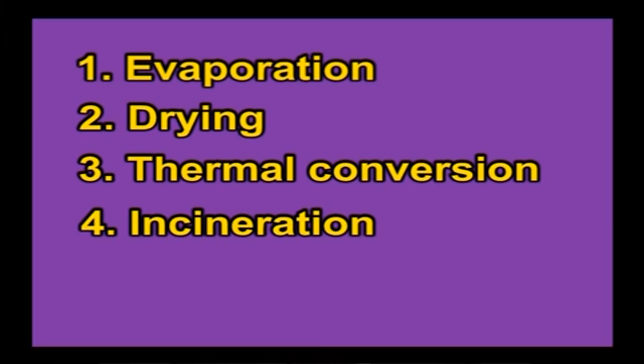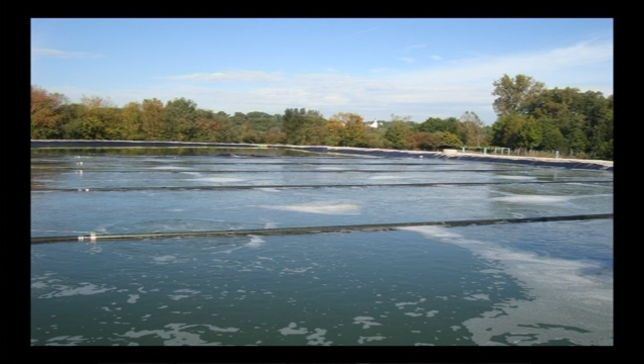Let us understand both the topics in this session under the following headings: evaporation, drying, thermal conversion, incineration, cleaning out flue gas, and solidifying outputs. The first topic, evaporation. Evaporation is a method used to concentrate non-steam volatile wastewater components. The evaporation plant contains a vapor condenser by which vapor and steam volatile compounds are separated from the concentrate.

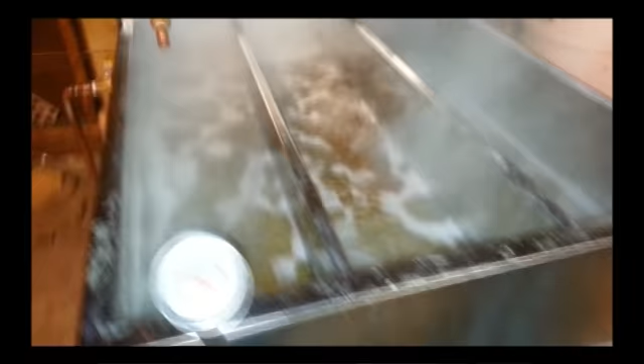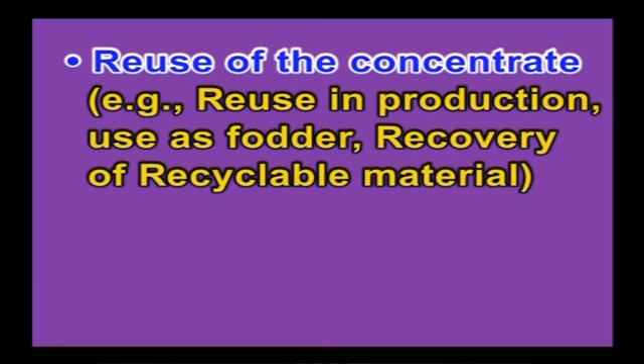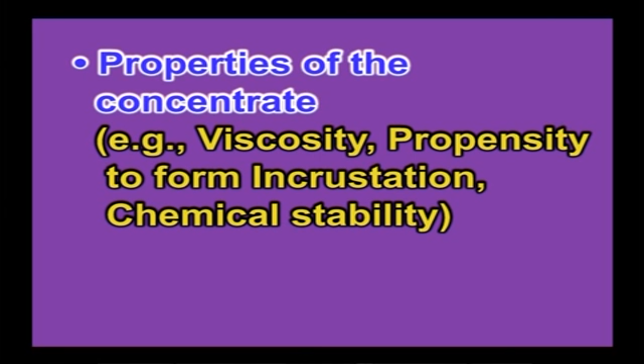While the concentrate is then recycled into the evaporator, the exhaust steam can be used for indirect heating of other evaporator stages. The degree of concentration of the wastewater components depends on different factors. For example, reuse of the concentrate, such as reuse in production, use as fodder, recovery of recyclable material; type of disposal of the concentrate, such as incineration or landfill; properties of the concentrate, such as viscosity, propensity to form incrustation, chemical stability.

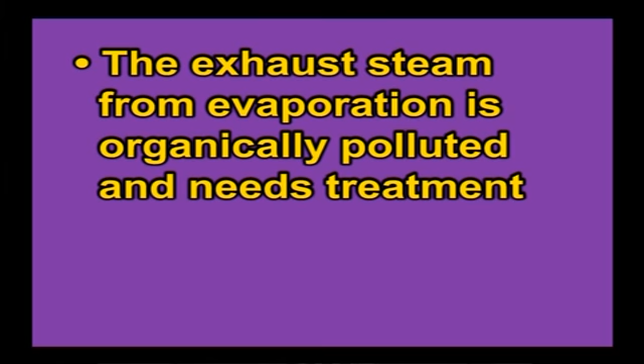Advantages of this method include: the residue can be reused as fodder and fertilizer, only a small area is needed, exhaust steam can be reused as energy, and it is considered state of the art in the food industry. Disadvantages of this method are: the exhaust steam from evaporation is organically polluted and needs treatment, and rather high operation and maintenance costs.

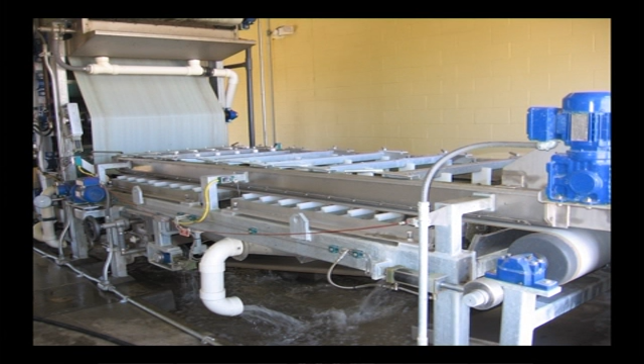Drying. Drying of a food material occurs when water vapor is removed from its surface into the surrounding space, resulting in a relatively dried form of the material. Drying differs from the dewatering process. In dewatering, liquid water is drained or squeezed out of the material, but during drying, the heat can be supplied in different ways: convection, radiation, conduction, microwave, radio frequency, or even joule heating.

The principle of drying, no matter what drying mechanisms are involved, can be generally expressed by the following surface vapor flux equation: N''v = hm (ρv,s − ρv,∞), where N''v is the vapor flux measured in kg per square meter per second, hm is the mass transfer coefficient measured in meters per second, ρv,s is the interfacial vapor concentration at the moist material surface, and ρv,∞ is the vapor concentration in the surrounding space that vapor travels into, measured in kg per cubic meter.

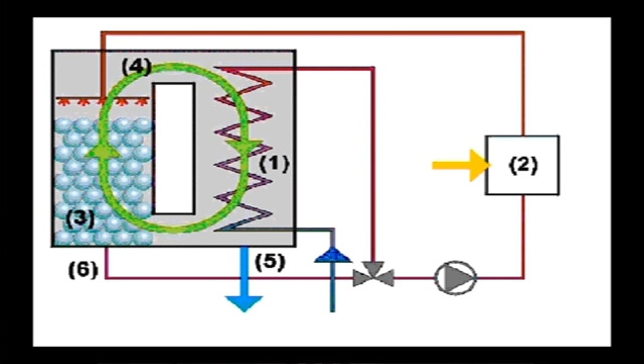hm is determined by the flow field around the material being dried, in meters per second, which may be viewed as a velocity of mass movement. When this vapor concentration difference is positive, vapor leaves the material and thus drying occurs. The reverse is the wetting humidification process. The drying process as a whole has to involve the generation of vapor, transforming from the liquid phase in the moist material to the gaseous phase on and within the moist material being dried, and the transport of the water phases towards the outside of the material.

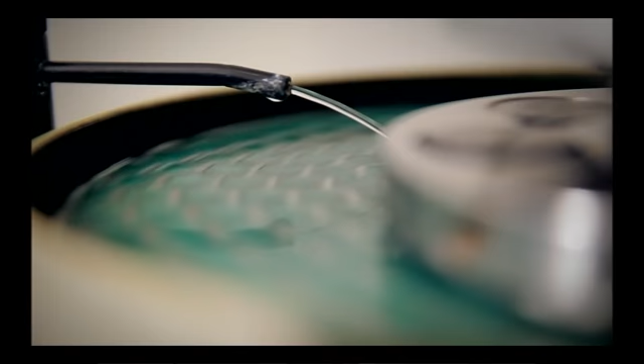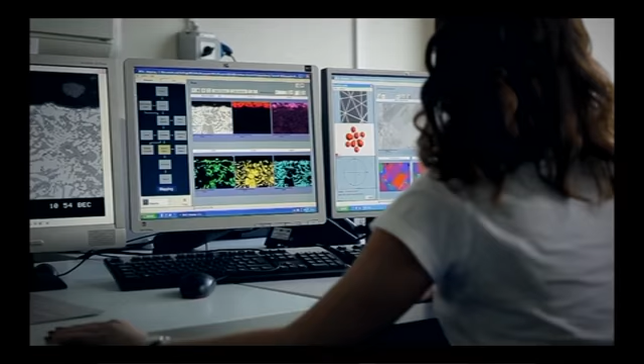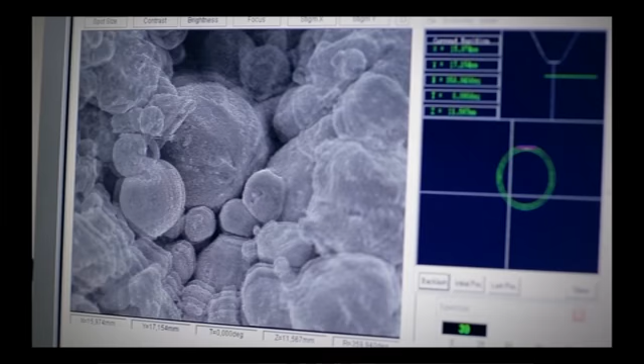Some debates are around how liquid water may move within the material structure. The microstructure of food materials is particularly relevant to drying, as both liquid water and water vapor move within the structure. The microstructure, as far as the transport of heat and chemical species is concerned, is mainly made up of compounds such as protein, fat, carbohydrate, minerals and air. Porosity and tortuosity are usual characteristics. The material's composition and its affinity to water play a key role in water holding capacity and local evaporation rates.

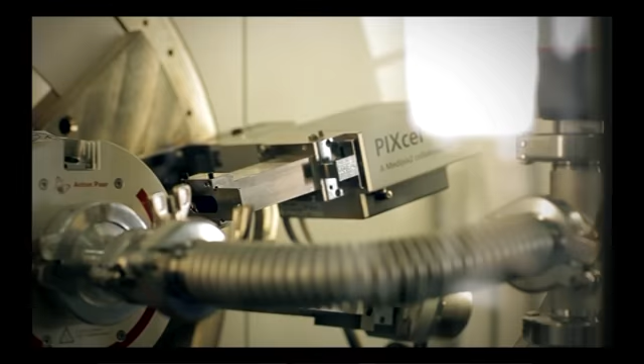Drying also creates a new microstructure as it progresses, and the spatial distribution of the microstructure characteristics, density included, is important in texture perception of the product and affects how it may be used as an ingredient for mixing into other foods. For instance, the reconstitution properties of food powders created by spray drying. For instance, microencapsulation is employed to protect active and beneficial ingredients such as probiotic bacteria during drying.

Drying is also preferably done at the lowest temperature possible for the same purpose of achieving higher retention of bioactivity. Bacterial cells or microorganisms are vulnerable in the drying process, especially when a high temperature environment is encountered. Drying may be viewed as a thermal processing stage. On the other hand, as mentioned above, preservation of the activities of good beneficial bacteria such as probiotic bacteria becomes important when the drying process can be detrimental.

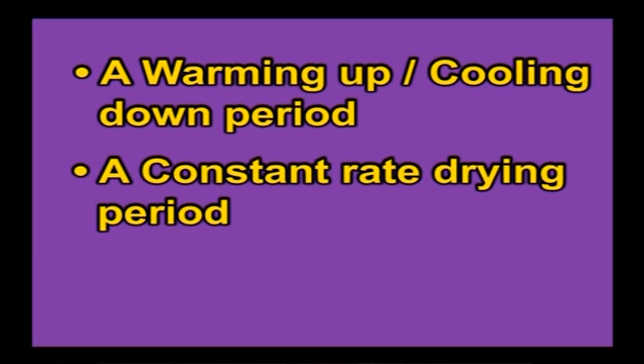There has been much research effort spent on understanding the fundamentals of drying and more complicated mathematical models published in the literature, but a concise introduction of drying still centers on the notion of three drying stages: a warming up or cooling down period, a constant rate drying period, and a falling rate drying period.

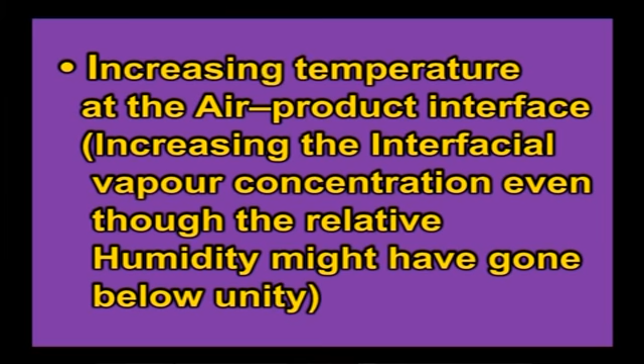The maintenance of the constant drying rate period may be due to two reasons. One is the increasing temperature at the air-product interface, that is, increasing the interfacial vapor concentration even though the relative humidity might have gone below unity. The other is due to the material's surface nature, where relative humidity can be kept constant for quite a long time.

There have been a large number of studies published in the past 2 decades on the drying of food and biological materials. In particular, the Page model appears to be the one that is the most successful in describing the weight loss versus time data obtained in a constant environment for drying.

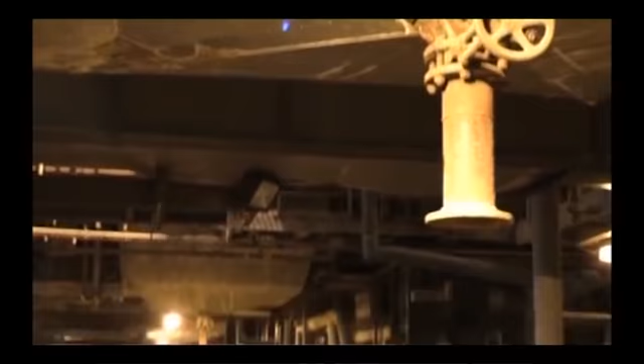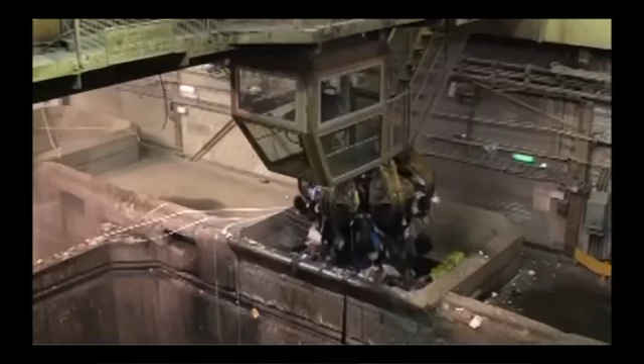Let us understand what is thermal conversion. The thermal conversion of solid waste includes transformation of wastes into gaseous, liquid and solid conversion products. The process also generates energy due to burning of waste materials. Thermal processing also results in waste volume reduction. Combustion or incineration, pyrolysis and gasification are the techniques employed for thermal conversion.

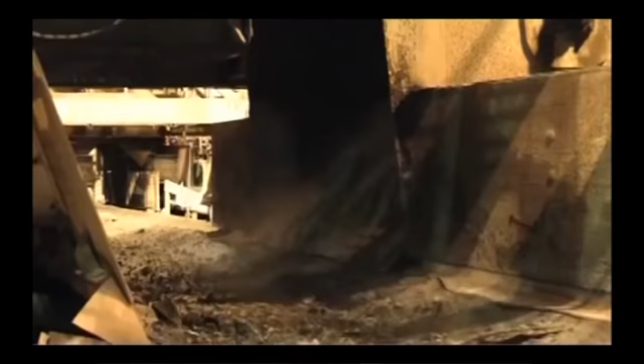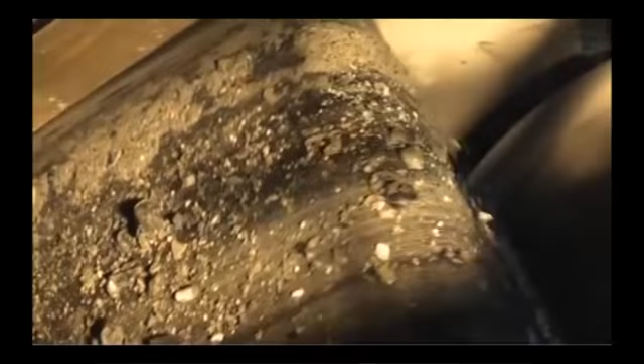A waste treatment technology which includes the combustion of waste for recovering energy is called incineration. Incineration coupled with high temperature waste treatments are recognized as thermal treatments. During the process of incineration, the waste material that is treated is converted into gases, particles and heat. These products are later used for generation of electricity. The flue gases are first treated for eradication of pollutants before going into the atmosphere.

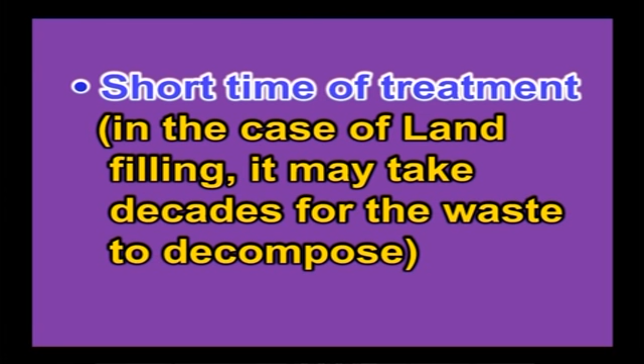Thermal treatment. In spite of the wide range of approaches to waste treatment in the food sector, in some cases thermal treatment is the most effective or the only one applicable. Compared to other disposal methods, it has a number of advantages such as short time of treatment. In case of landfilling, it may take decades for the waste to decompose.

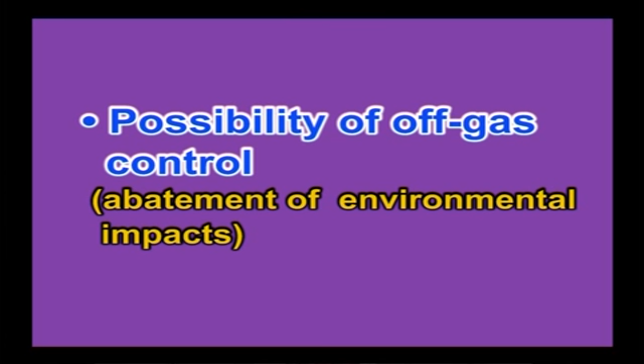Another one is the possibility of treating hazardous waste, as for example in the case of animal carcasses contaminated by dangerous contagious microorganisms, possibility of off-gas control, abatement of environmental impacts, and possibility of utilizing heat released by the oxidation process, that is waste to energy. The thermal treatment may be used for a wide spectrum of waste from solid to gaseous.

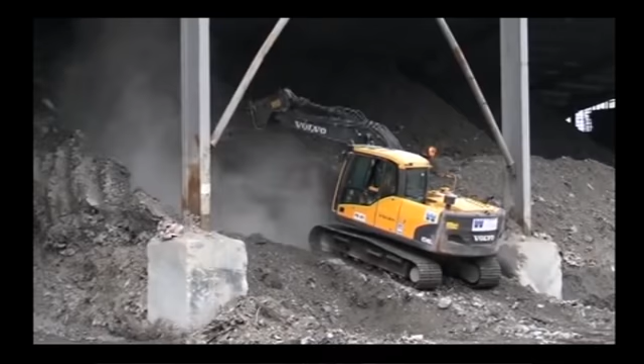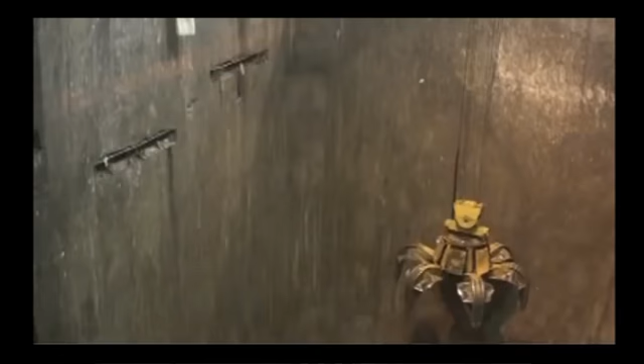The choice of suitable thermal treatment technology is then based on the type of treated waste and its characteristic properties. Examples described below include completely different technologies applicable to different types of waste. Incineration of solid residues with relatively low water content and free of hazardous properties may be performed in units very similar to biomass boilers. A typical example is provided by peach and olive pits. Due to the character of this waste, it is not necessary to equip the units with complicated flue gas cleaning systems.

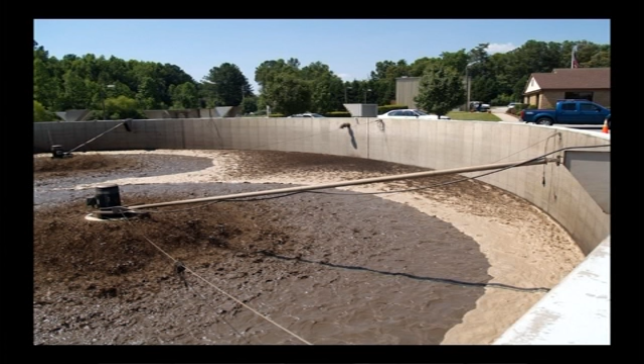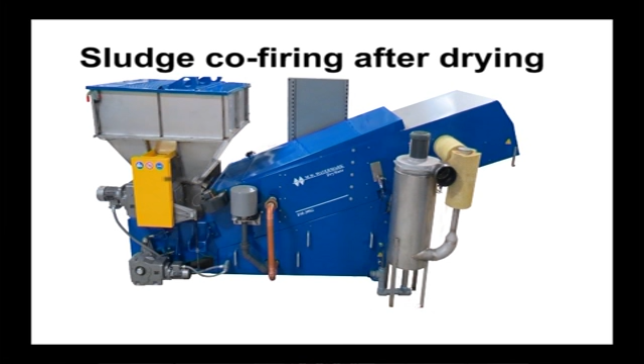Another example of solid waste is sludge, namely wastewater treatment plant sludge. In contrast to the latter example, high water content may be expected, thus requiring a completely different approach and technologies. One possibility is sludge co-firing after drying. One suitable process is cement and burned lime production, where an alternate fuel can be fed using a special feeder directly into the rotary kiln. In some cases, however, it is necessary to apply special sludge incineration technology.

This is very often based on a multiple hearth combustion chamber. For hazardous waste like some types of meat and bone meal, thermal treatment is the only alternative. In such cases, systems based on a rotary kiln and secondary combustion chamber are preferred.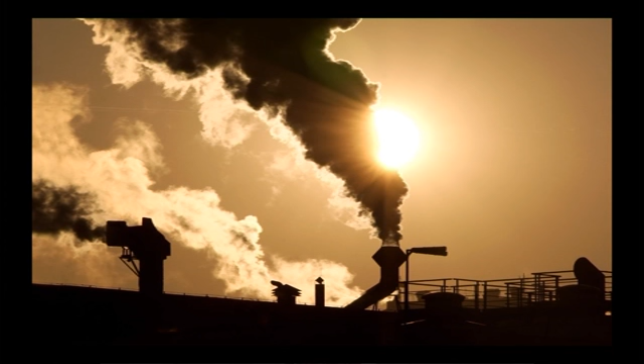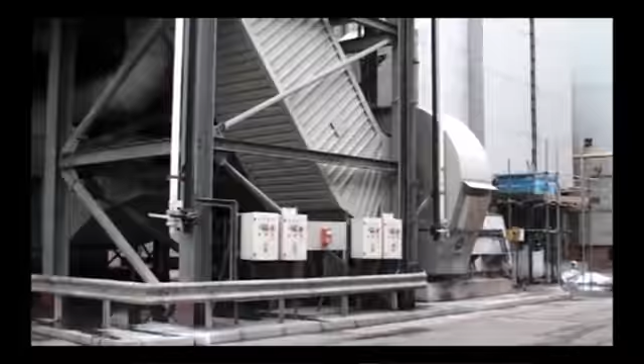Let us understand incineration. Incineration as a disposal method involves burning the trash. Sometimes this is simply referred to as thermal treatment, as a general category of high temperature treatment of trash material. This method can be used to transform waste into heat, gas, steam and ash.

One of the advantages of incineration is that with this method, refuse volume can be reduced by half or more, and it requires little usage of land. An incineration facility can be built in a small area to process huge amounts of waste. It definitely saves a lot of space compared with using a landfill only. This method is popular in countries like Japan, where space is a limitation.

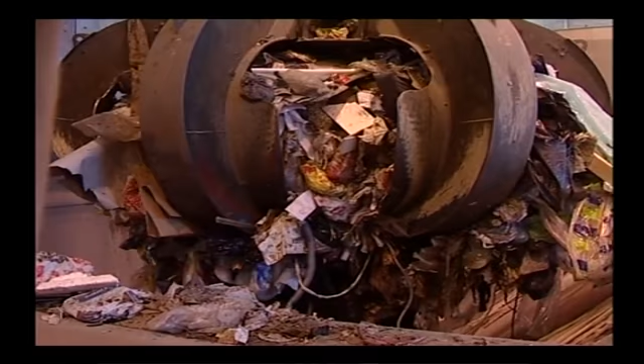Incineration of waste materials converts the waste into ash, flue gas and heat. The ash is mostly formed by the inorganic constituents of the waste and may take the form of solid lumps or particulates carried by the flue gas. Some incinerators generate energy from the burning of waste.

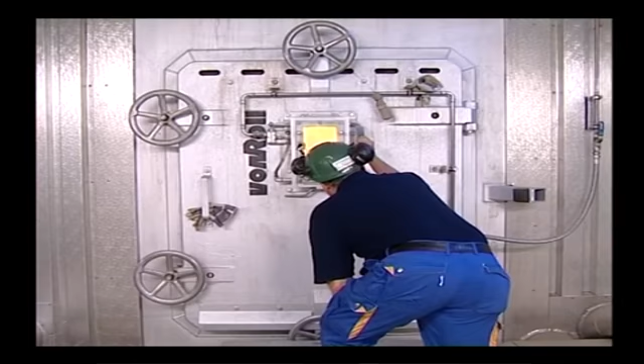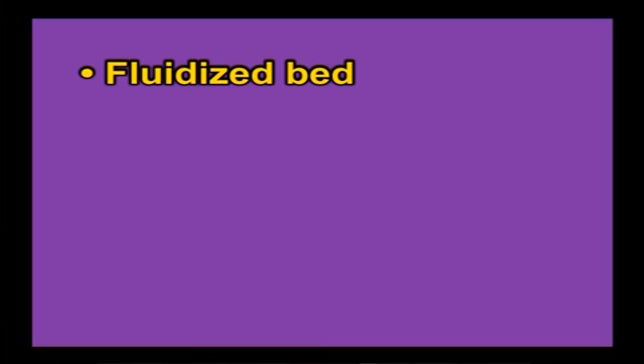These plants are called waste to energy plants. Incinerators reduce the volume of waste by about 90% and weight by 75%. There are 8 types of incinerators: fixed hearth incinerators, rotary kiln, plasma arc, liquid injection, fluidized bed, multiple hearth, catalytic combustor and static hearth incinerators. In 1885, the US Army created the first garbage incinerator in the New York harbor.

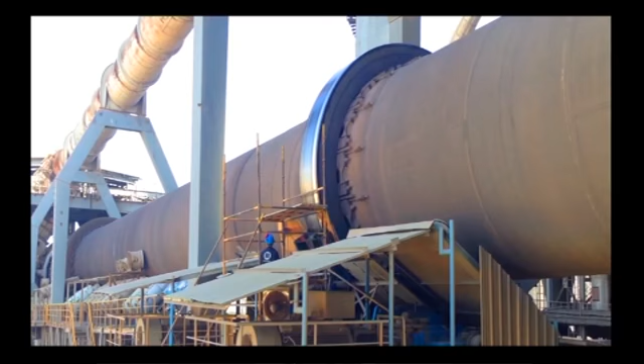Let us understand these types of incinerators. Let us understand the first one, rotary kiln. The rotary kiln hearth system has been used for several hundred years in the pyroprocessing industry. The rotary kiln concept accomplishes two objectives simultaneously: moving solids into and out of a high temperature combustion zone and mixing and stoking the solids during combustion.

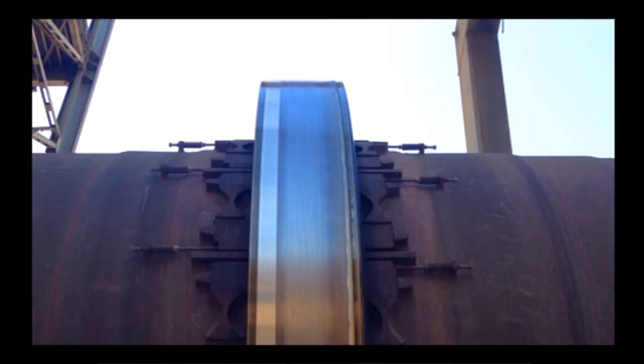In its classical embodiment, a kiln is comprised of a steel cylindrical shell lined with abrasion resistant refractory to prevent overheating of the metal. A kiln is generally inclined slightly toward the discharge end, and the movement of the solids being processed is controlled by the speed of the rotation.

In some instances, special provisions have been made for air cooling or water cooling the kiln shell, thus eliminating the use of refractory. For example, a steel kiln cooled with external water sprays known as the Lantz converter was developed for pyrolysis application in the mid 1960s. In the later 1970s, a new kiln technology emerged involving a water cooled kiln cylinder fabricated of steel boiler tubes welded together and manifolded for the introduction of feed water and withdrawal of steam.

The other one is the plasma gasification. Plasma gasification is another form of waste management. Plasma is primarily an electrically charged or a highly ionized gas. Lightning is one type of plasma which produces temperatures that exceed 12,600 degrees Fahrenheit. With this method of waste disposal, a vessel uses characteristic plasma torches operating at plus 10,000 degrees Fahrenheit, creating a gasification zone till 3,000 degrees Fahrenheit for the conversion of solid or liquid wastes into a syngas.

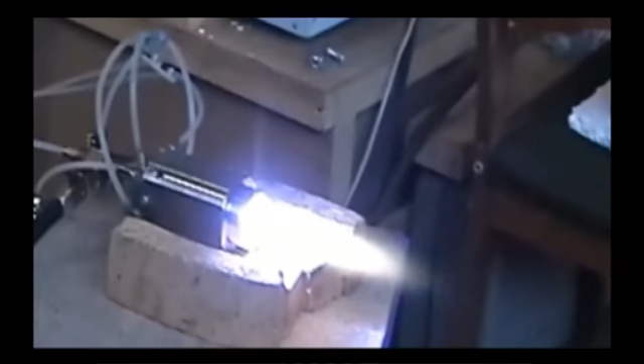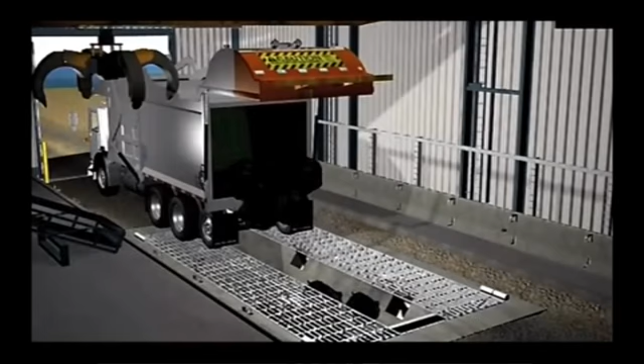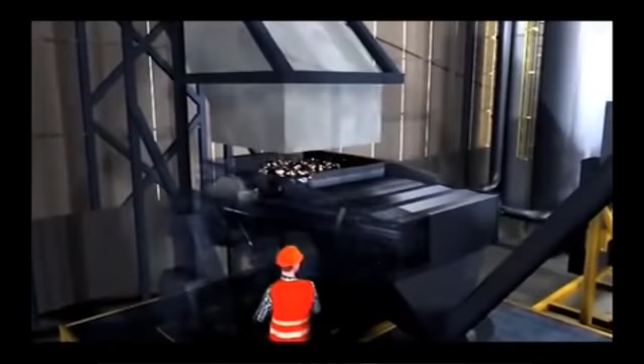During the treatment of solid waste by plasma gasification, the waste molecular bonds are broken down as a result of the intense heat in the vessels and the elemental components. Thanks to this process, destruction of waste and dangerous materials is found. This form of waste disposal provides renewable energy and an assortment of other fantastic benefits.

Plasma arc incinerators ionize inert gases via an electric arc between two electrodes. This plasma creates an extraordinary amount of heat ranging from 3000 to 7000 degrees Celsius. The extreme heat can easily break down organic compounds into their basic atoms, which later recombine to form gases such as carbon dioxide. Inorganic material is left as a stable, leach resistant slag. Concerns surrounding plasma arc incineration include ensuring that gas emissions are minimal and clean before being released to the atmosphere.

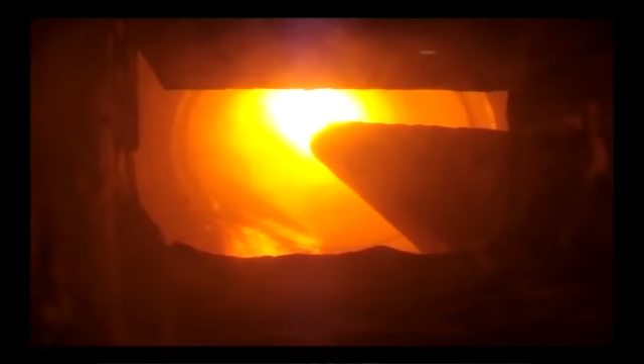Another type is the fluid bed systems. Fluid bed incineration systems, bubbling fluid bed applications in burning biological wastewater sludge and circulating fluid bed applications in burning hazardous wastes, are widely employed. These two waste management areas were the dominant applications of fluid bed technology in the United States at the beginning of the 1990s, but several applications for municipal solid waste could be found in Japan and Europe.

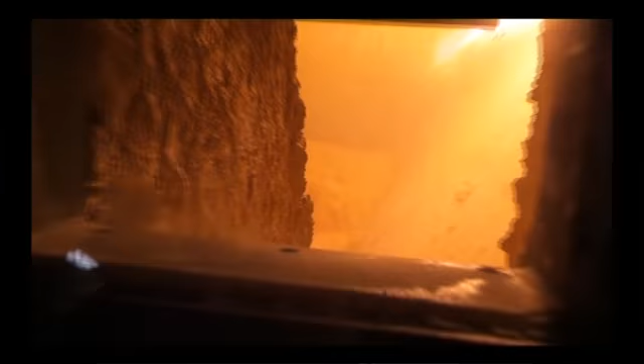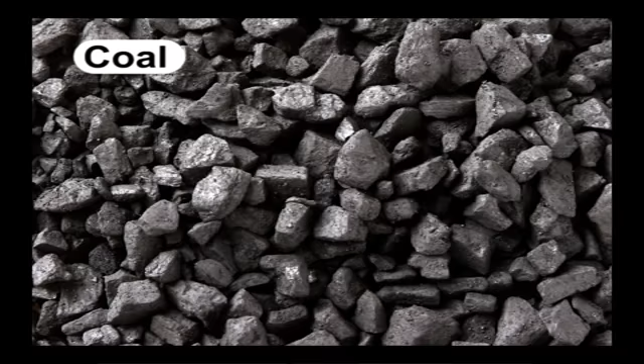In order to provide a feed bed with relatively homogeneous composition and size, almost all solid waste fired in bubbling fluid bed or circulating fluid bed units is pre-processed or at least made somewhat more homogeneous through waste separation at the point of generation. Both bubbling fluid bed and circulating fluid bed furnaces can accept other fuels such as wood chips, coal or chipped tires. By acquiring these relatively clean alternate energy sources when the prices are favorable, energy revenues can sometimes be increased significantly with little increase in maintenance and operating cost.

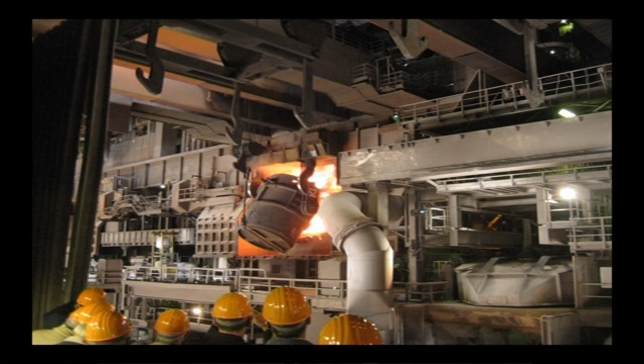The other type is the stationary hearth system. Those incinerator furnace systems that operate without grates include the stationary hearth, rotary hearth and rotary kiln. The stationary hearth is usually a refractory floor to the furnace, which may have openings for the admission of air under slight pressure below the burning material on the hearth, in the manner of the blacksmith's forge.

In the absence of underfire air ports, air is admitted along the sides or from the top of the furnace and combustion proceeds in the same surface burning manner as in the bonfire, but with improved conditions due to the re-radiation of the heat from the surrounding furnace walls and roof. Unless the refuse being processed provides a porous burning mass, it is necessary to provide manual stoking with slice bars to stir the mass of refuse in order to achieve a reasonable burning rate and degree of burnout.

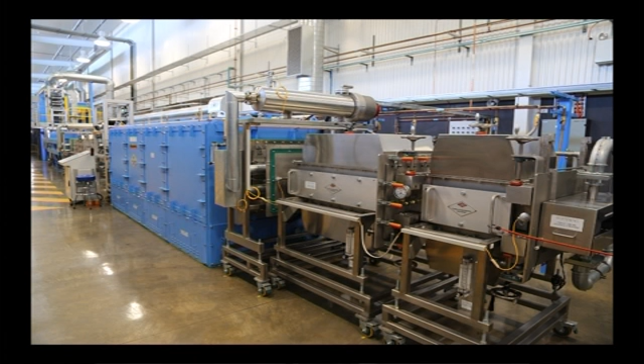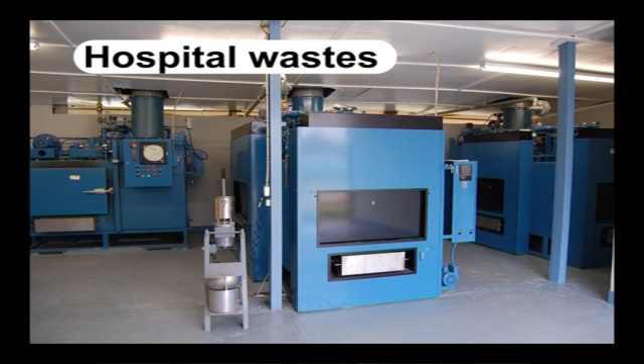Stationary hearth furnaces are used for most commercial and smaller industrial incinerators. They are also used almost exclusively in crematories and for hospital wastes. For the latter applications, auxiliary gas or oil burners are used to maintain the furnace temperature in the range of 650 degree to 900 degree centigrade in the presence of adequate quantities of oxygen from air, well dispersed throughout the

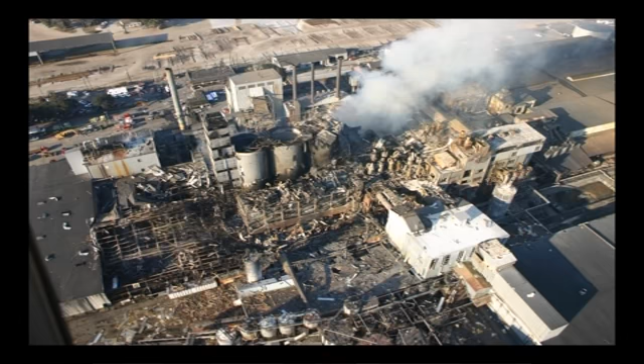gas. In burning such high moisture waste, primary chamber burners are needed to ensure complete oxidation of combustible solids and vapors for the elimination of smoke and odors. Confident smoke and odor control requires auxiliary fuel burners under automatic temperature control in a secondary combustion chamber.

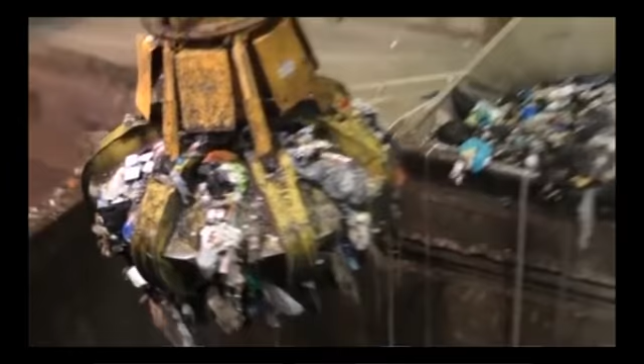Another type is the moving grate system. The incinerator plant used for treating municipal solid waste is moving grate. This grate is capable of hauling waste from the combustion chamber to give way to complete and effective combustion. A single such plant is capable of taking 35 metric tons of waste every hour for treatment. Moving grates are more precisely known as incinerators of municipal solid waste.

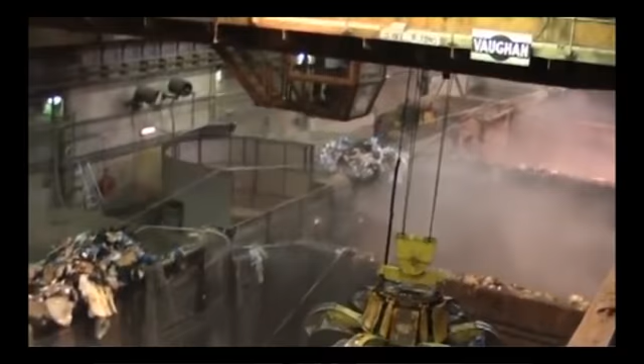This waste is poured in the grate with the help of a crane. From here, the waste has to move towards the ash pit. Waste is further treated and water washes out ash from it. Air is then flown through the waste and this blown air works for cooling down the grate. Some of the grates are cooled with the help of water.

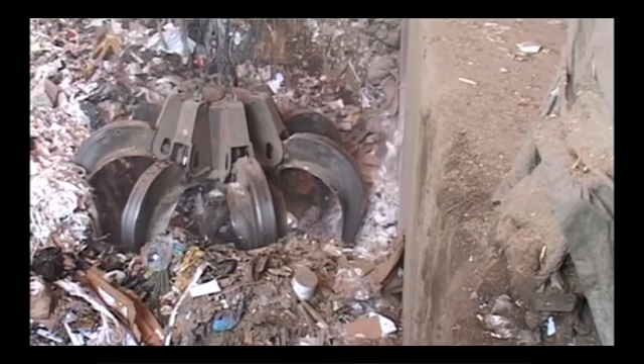Air is blown through the boiler another time, but this time comparatively faster than before. This air helps in complete burning of the flue gases with the introduction of turbulence leading to better mixing and excess of oxygen. In some grates, the combustion air at fast speed is blown in a separate chamber.

The European Waste Incineration Directive is of the view that an incineration plant must be designed so that the operating worker must know that flue gases are reaching the temperature of 850 degree centigrade for 2 seconds. This would ensure complete and required breakdown of toxins of organic nature. In order to achieve this, backup auxiliary burners must always be installed.

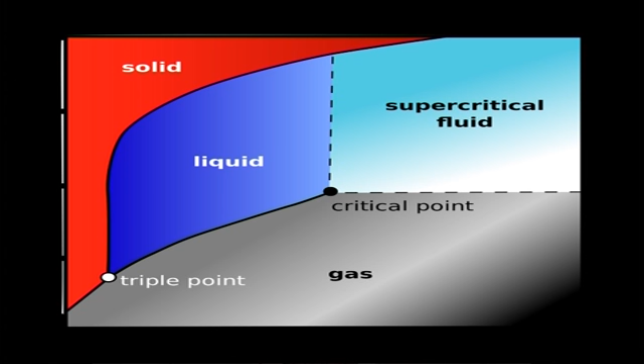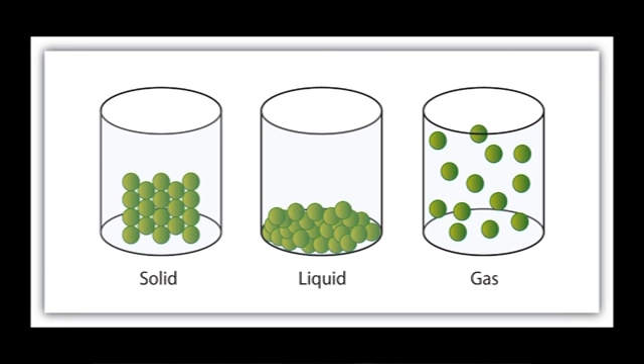We need to have a system analysis for the successful incineration process. The basic information used in the analysis of combustion systems can include tabulated thermochemical data, the results of several varieties of laboratory and field analysis, and basic rate data. Guiding the use of these data are fundamental relations that prescribe the combining proportions in the molecules and those that indicate the course and heat effect of chemical reactions.

The last being the cleaning of flue gas and solid outputs. A number of processes are involved for the cleaning up of flue gas. The mixture of flue gas is collected by means of particle filtration, and this filtration is conducted using electrostatic precipitators and baghouse filters. Baghouses are very effective for fine particles.

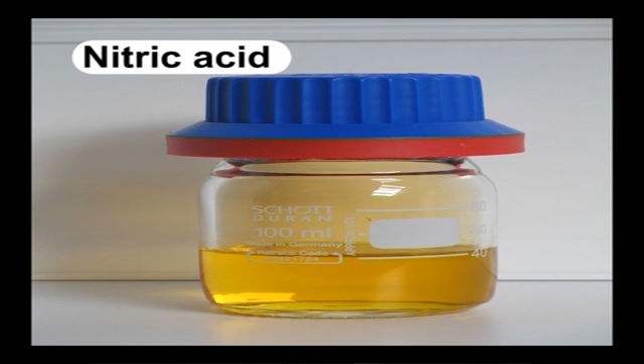The next step of the processing and cleaning of the flue gas is processing by scrubbers, which are critical for the removal of hydrochloric acid, nitric acid, mercury, hydrofluoric acid, lead and residual heavy metals. With the reaction of lime, sulfur is converted into gypsum. The wastewater which comes out of the scrubbers is then passed through a wastewater treatment plant.

Desulfurization is a process that is used to remove sulfur dioxide with limestone slurry injection directly into the flue gas. The nitric components of gases are reduced with catalytic reduction with the help of ammonia application. Heavy metals are removed with the help of activated carbon injection. Particles are collected at the filters.

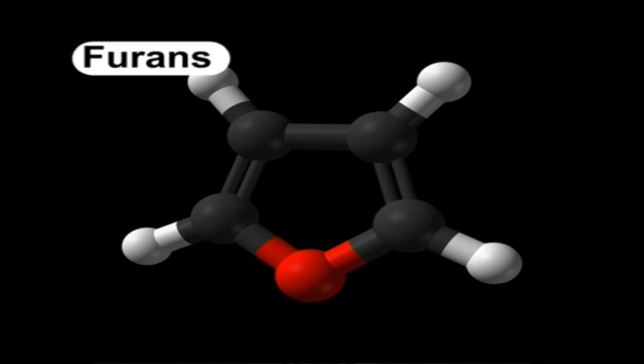The heavy metals which are contained in the fly or bottom ash are lead, cadmium, zinc and copper. A small amount of furans and dioxins are also produced. It is to mention here that bottom ash seldom has heavy metals in it. Fly ash is hazardous, while bottom ash is not that dangerous or injurious to health.

In conclusion, incineration is considered to be the best method of waste management over landfill, provided it helps in recovery of energy from the solid waste. Even though landfill is the most commonly practiced form of waste management, its contribution to the pollution of groundwater and air through leachates and even huge requirements of land has made incineration most suitable for management of selected solid wastes.